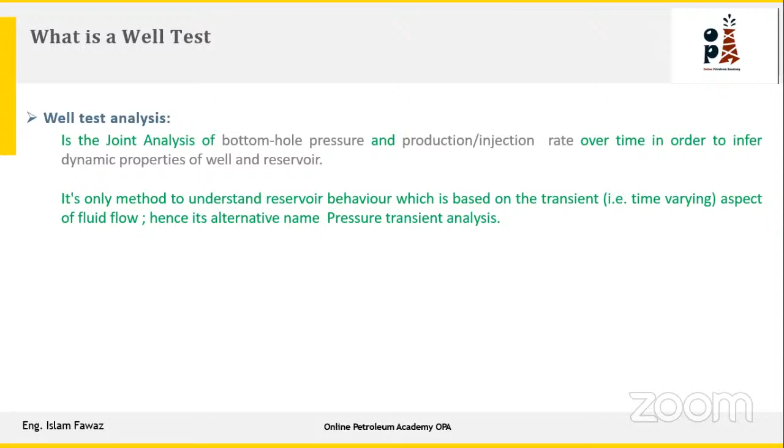This method mainly relies on the transient state, meaning the pressure wave doesn't hit any boundaries, such as an aquifer, a fault, or a change in thickness, which could all be considered as a boundary system in pressure transient analysis.

The most important point when talking about well test analysis is to integrate the data with other disciplines. Don't work in isolation, because in pressure transient analysis you can interpret different models and have different scenarios. So we need to integrate this model with other disciplines like geology, petrophysics, and fluid characterization, in order to incorporate all these points into the simulation model and reduce the uncertainty in your reservoir.

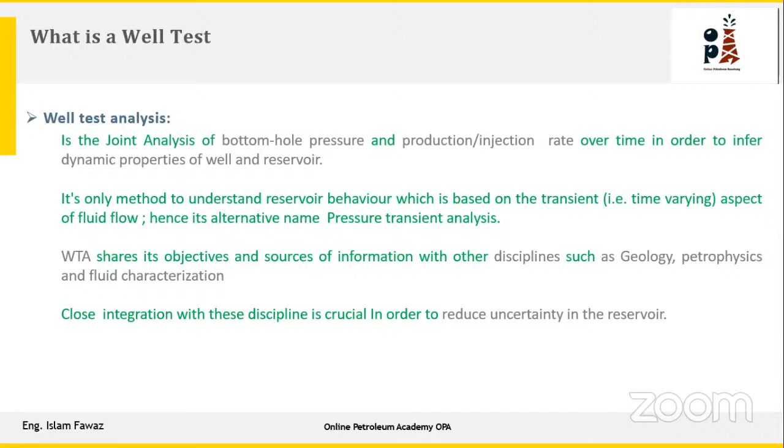So when you ask, I can get the productivity from pressure transient analysis, and I can also get the connected volume, what is the difference? Now, if I have a well with the bottom hole flowing pressure and the rate, dividing the rate by delta P gives the productivity index of the well. So what is the difference between this and the well test? How do we delineate this from the PI?

PI, as I said, is the productivity index for the well, which is the rate over delta P. This rate incorporates different parameters like permeability, the drainage area of the reservoir, and the skin factor — all lumped into one parameter called the productivity index of the well. So the productivity index from the well test tells us how good or bad the well is, because we need to discriminate between the skin and the permeability. If the well is producing well, it's okay, we use the permeability.

But if the well has a bad performance, how to discriminate between the bad performance? Is this related to the permeability of the reservoir or related to the skin? From the well test analysis, we can discriminate between this. Also, we need to delineate it from the material balance itself.

From the material balance itself, the reserves allocated for the well started from the initial reservoir pressure until the reservoir pressure is depleted to the current reservoir pressure. We produce some volumes, and by running the material balance, this is the connected volume. So what is the difference? From the material balance, we can get the connected volume. From the well test analysis, we can get the connected volume. But the difference here is how the connected volume is distributed in the reservoir, since we can define it from the material balance and from the well test analysis.

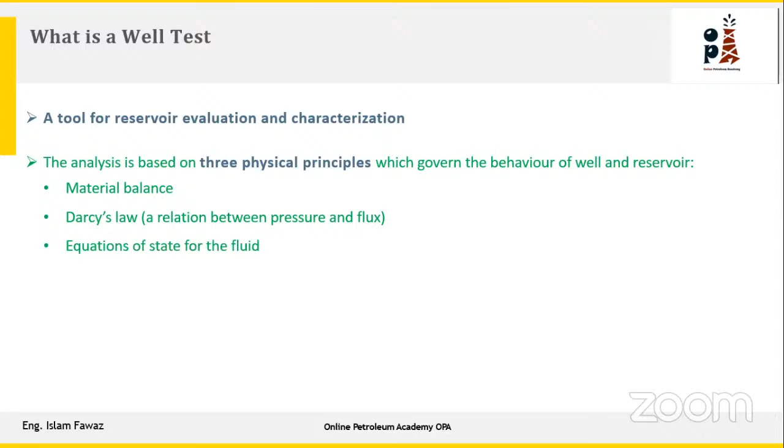So well test analysis is a tool used for reservoir characterization and mainly based on three basic principles. First one, which is the material balance concept. Second one, which is Darcy's law, which is relating the pressure and the flux of the well. And the third one, which is the equation of state of the fluid.

So what is the objective of well test? The objective of well test is used mainly to define the reservoir limit. If we drill a well and we have exploratory wells and we have a sand, I need to define the boundaries of the reservoir, how much connected volume with the reservoir. So we run the drill stem test to define the reservoir limit, the distance to the boundaries and the drainage area for this.

Second one was production. We need to define the average reservoir pressure from the well test. We need to characterize the reservoir in order to impose this for a simulation model. We need to define the permeabilities from the well test. We need to define the completion efficiency from the well test. We need to define the skin factor. We need to define the reservoir model.

We have a layered reservoir or we have a composite reservoir. We need to define the contact. We need to define the gas contact. We need to define the condensate banking from the well test. We need to diagnose the productivity problem from the well test by defining the permeability and the skin.

As I said in the first slide, the productivity index is a lumped single parameter which reflects the state of the reservoir. But from the well test, we can define whether this performance is related to the permeability or related to a skin factor. The last one, we can evaluate the stimulation treatment. We need to find the skin factor, find the fracture half length of the reservoir, find the fracture conductivity, and so on.

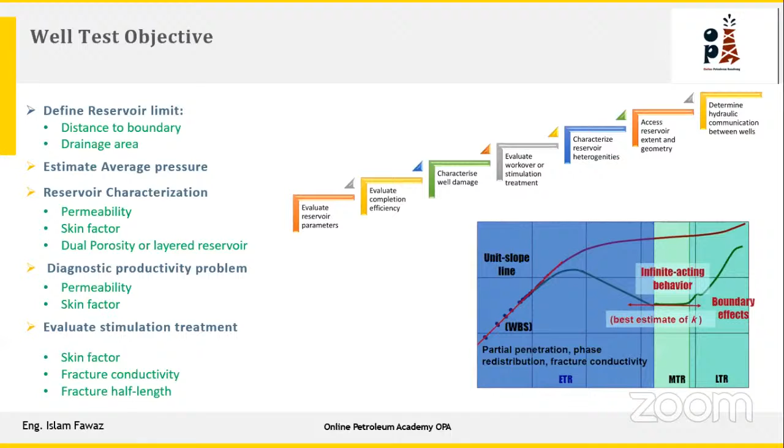So how do we test a well? Testing a well is just to create a step change in rate, for instance, in case of making a pressure buildup, we shut in a producing well. In case of making a drawdown, opening a shut-in well. In case you are performing a falloff test for an injector, we close the injection well.

So as you see here, we have designed the well to produce with a constant rate. After that, we shut in the well. After we shut in the well, this is the corresponding bottom hole flowing pressure, because due to this production, after we shut in the well, the pressure will increase. We analyze this point to refer to the productivity or the characteristic of the reservoir itself.

Okay, so testing the well is just to create a step change in the rate and measuring the response due to this step change in the rate. So as I said, this is the well test sequence here, and this is the graph showing the pressure profile, and this showing the rate profile here. First, we produce the well at constant rate. Why constant rate? Because constant rate is to measure the constant state of the reservoir. If we have variable rate, we can tackle this point by superposition.

We'll talk about what is meant by superposition. So this well is producing at 600 barrels per day, and this is the corresponding bottom hole flowing pressure.

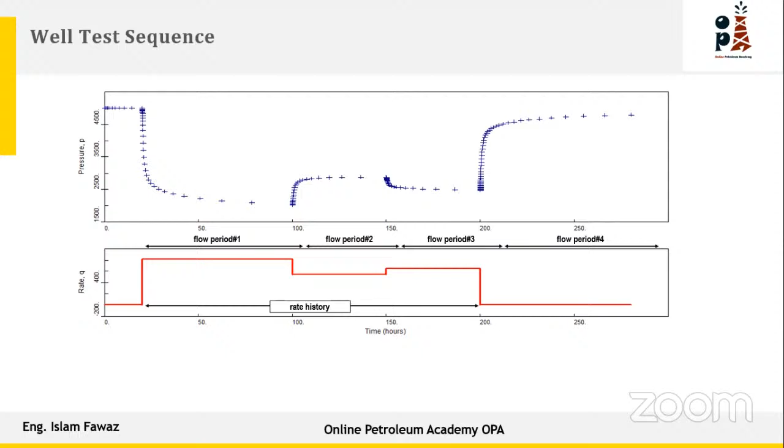We have different flow periods here, and we analyze this increase in the reservoir pressure, because analyzing this point is subject to the rate history you are performing for the well. We just make a rate history for this reservoir, producing the well at a constant rate, and then shutting the well to measure the disturbance that you are making for your reservoir.

The second point we need to talk about is what is meant by production data analysis. As you can see here, we have three main portions of production data analysis: well test analysis, rate transient analysis, and decline curve analysis.

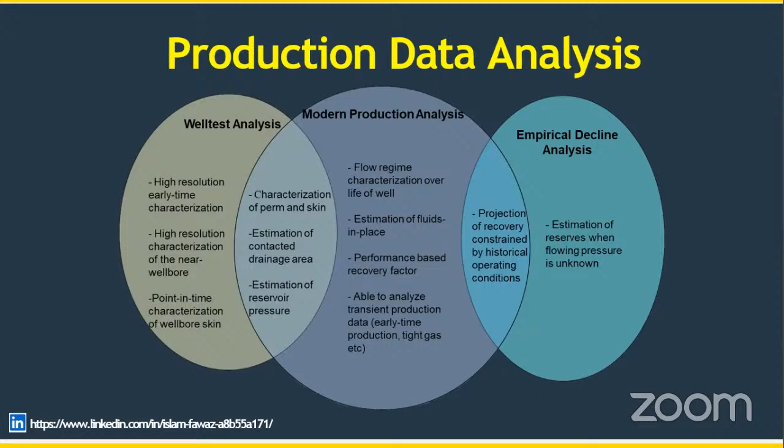And as shown here, we have overlap between the well test and decline curve analysis, which is the rate transient analysis. We'll talk more about this in the next slides.

So what is meant by production data analysis? Production data analysis is the science and art of using information about the reservoir, completion, and/or surface operation, based on continuous interpretation of the data, like bottom hole flowing pressure and the rate.

Based on that, we can give information about the reservoir characteristics, like permeability, fracture properties, and the connected volume.

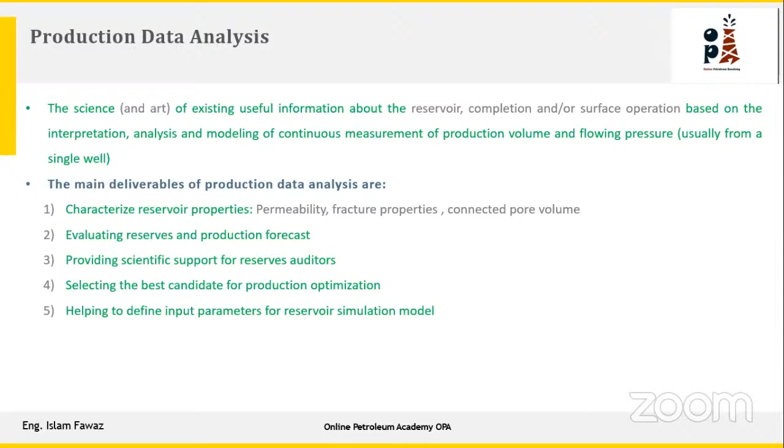Also, we can define the reserves and this can help us for the production forecast. It also provides scientific support for reserve auditors, selecting the best candidate for production optimization, and helps assure the input parameters for reservoir simulation.

As you can see from this plot, we have three main portions of production data analysis. The first portion is pressure transient analysis. As you can see, it is standalone, and the decline curve analysis is also standalone.

We can get from the pressure transient analysis the connected volume, OOIP, and/or the connected gas in place, and from the decline curve analysis we can get the EUR for this well or reservoir.

But as you see here, we have overlap between rate transient analysis, pressure transient analysis, and decline curve analysis. We can get the same information from the decline curve: we can give the EUR as you get from decline curve analysis, and we can give the oil in place as you get from pressure transient analysis.

So what is the difference between all of this? The difference between pressure transient analysis and rate transient analysis is that no shut-in is required, because rate transient analysis doesn't require shutting in the well.

We just need a permanent gauge, or the bottom hole flowing pressure, continuous measurement of the bottom hole flowing pressure and the rate, and after that you can get data about the reservoir characteristics. For the rate transient analysis, we can get the connected volume from the flowing material balance.

So what is the difference? Rate transient analysis is based on physics, based on science, based on the data.

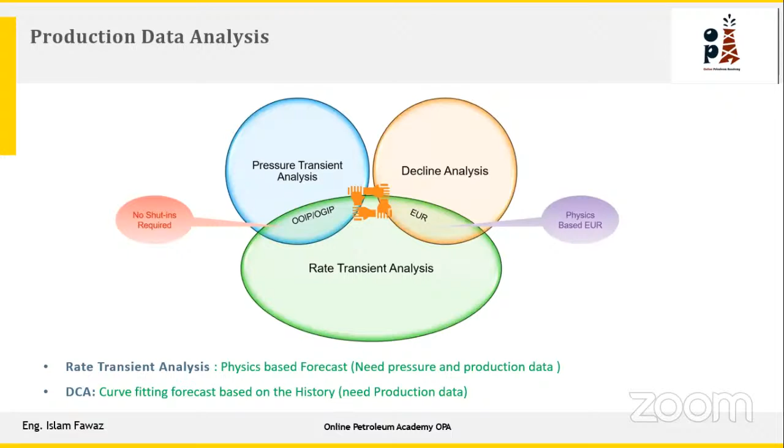But the decline curve analysis is mainly based on analogs, mainly based on empirical correlation. Fitting the data, after fitting the data, we can get the EUR connected for this well. So in conclusion, decline curve analysis is an empirical equation, and rate transient analysis is based on physics.

So for the decline curve analysis, what we are getting is developed by Arps. We just have a rate history, we don't require a bottom hole flowing pressure. We fit the rate history, and after fitting the rate history, we can get the EUR for the well.

The key parameter in the language of the reservoir engineer is the b-factor. It means b=0 equals exponential, b=1 equals harmonic, and b between 1 and 0 is hyperbolic. This is very important because the b-factor has physical meaning — it mainly depends on the drive mechanism.

If we have a depletion drive mechanism, meaning we have a severe decline in pressure, the B factor is equal to 0. But if we have support for the reservoir, the B factor will be higher, and the reserves will be higher. So mainly for decline curve analysis, we just fit the data. After fitting the data, we interpret it: what happened in the past will continue in the future. After that, we can get the production forecast and recoverable reserves under the operating and current conditions.

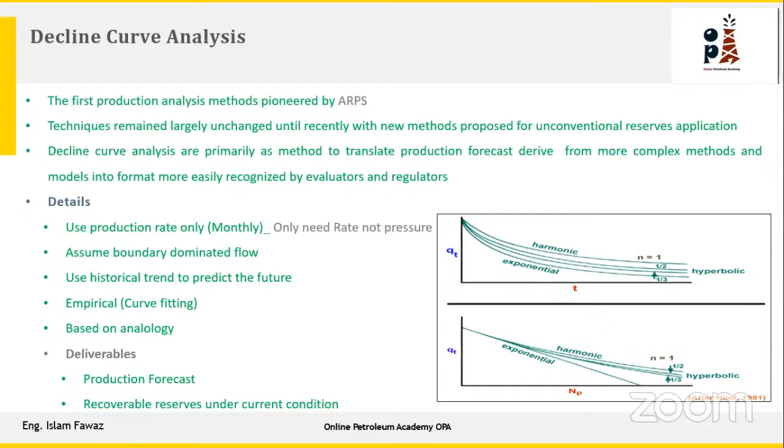So again, decline curve analysis is an empirical decline analysis, and the main golden rule for decline curve analysis is: whatever factor controlled the decline in the past will continue to control the decline in the future.

So we have two main factors which affect the decline curve analysis. One is related to reservoir condition, which is depletion. The other is the number of wells. If we have a higher number of wells, the decline would be more, accelerating the reservoir. The drive mechanism, if we have a depletion drive mechanism versus a strong aquifer support, this will reflect on the decline rate itself.

Reservoir characteristics in terms of permeability, porosity, phase distribution within the reservoir, saturation changes, and relative permeability also matter. Another factor is related to the operating condition, like changing the artificial lift, choke size, back pressure on the well, or operating separator pressure.

That's why when performing a decline curve analysis, some companies perform it on a CD rate, and other companies perform it on a BD rate. The difference: CD is calendar day, and BD is the number of hours the well is actually on production.

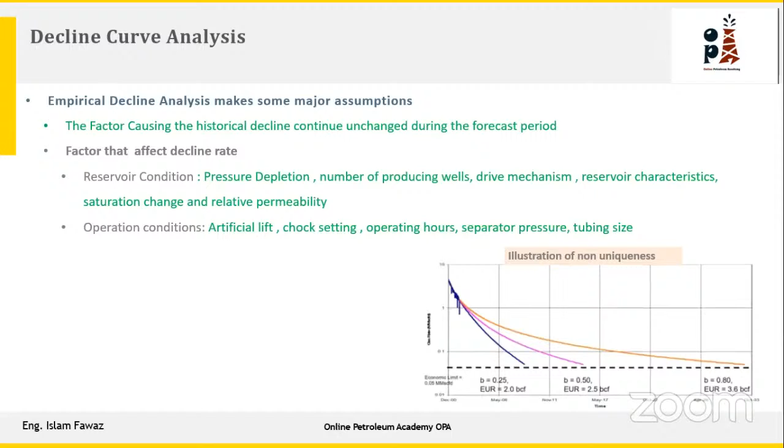So for decline curve analysis, yes, it's easy, we can do it. The advantage is it's very simple and gives a rough indication of well performance, but we have limitations for decline curve analysis.

From its limitations, we assume constant operating condition, we assume the reservoir pressure behaves in a constant way, and we assume the reservoir has reached its boundaries. In transient flow, we cannot perform decline curve analysis. But once the wave reaches the boundaries of the reservoir, meaning we're in boundary dominated flow, we can apply decline curve analysis.

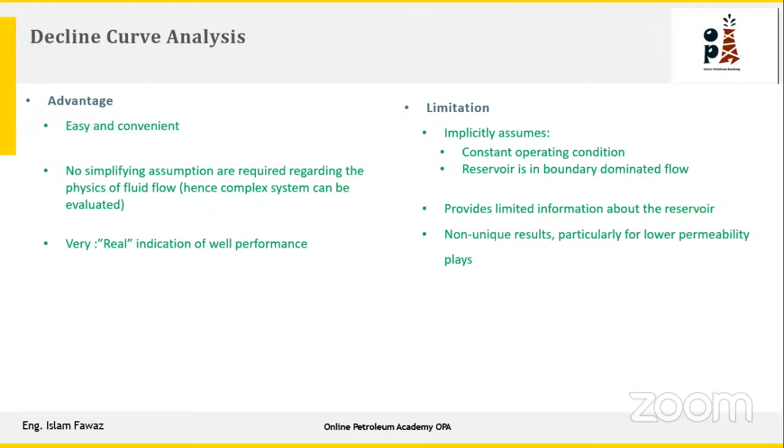Also, a main limitation of decline curve analysis is the non-unique result. Every engineer performing decline curve analysis can get a different number, and all of those numbers are possible outcomes. So we have non-uniqueness of results, particularly if we have a lower permeability reservoir or lower permeability play.

When you have a low permeability reservoir, as I said in pressure transient analysis, you produce the well at a constant rate, then make a step change, shut in the well, and measure the pressure buildup response. But if we have a low permeability or nano-darcy permeability reservoir, how do we characterize it? We need to think about a different concept: how to characterize the reservoir in a low permeability setting. We can use rate transient analysis.

Rate transient analysis is the same principle as the PTA, but is mainly focused on the late time region, mainly the boundary dominated flow. This does not replace the PTA in all circumstances. We just have continuous bottom hole flowing pressure measurement and a rate, with a single phase in the reservoir, and then we can perform rate transient analysis by different graphs.

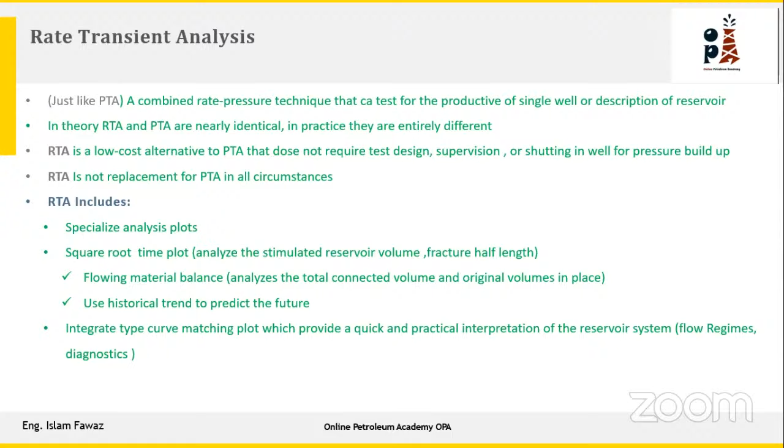As I said in the first slide, it is science and art. This is art because we have a log plot, we have a square root plot. All of those plots just give more insight about the data itself. So we have a specialized plot in order to give more insight about the reservoir characteristics or about the boundaries of the reservoir. And after that, we can integrate all the valuable information together to get more insight about your reservoir.

We can solve rate transient analysis for single phase above the bubble point pressure, because we have constant fluid properties like density and viscosity, and constant compressibilities. But in a gas system it is more complex and we need some correction for the pressure, because the fluid properties will change heavily at higher pressure for gas. But in case we have a variable rate, we can handle this variable rate by superposition, for rate transient analysis and for pressure transient analysis.

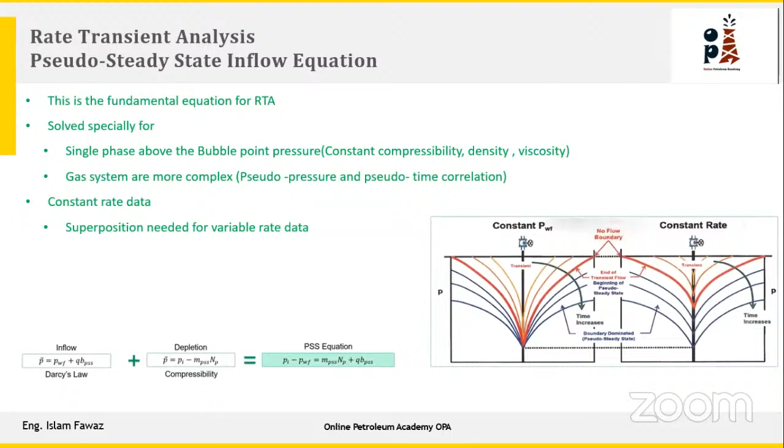So we have two components for rate transient analysis. One component is the inflow parameters, which come from Darcy's law. It relates the difference in pressure due to the influx, between the average reservoir pressure and the bottom hole flowing pressure, to Q times b PSS. We'll talk about this in more detail. Plus the depletion term, like the compressibility term, for a volumetric reservoir. This comes from this point. After that, we integrate Darcy's law and the material balance equation in order to get the pseudo steady state condition, which is mainly used for rate transient analysis.

Let's come to the inflow term here. As you see, this is the well, this is the boundary of the reservoir, this is the bottom hole flowing pressure, this is the average reservoir pressure, and this is the initial reservoir pressure, P star. So what is meant by inflow properties or the inflow term here? As you know, this is the Darcy equation, Q = k A ΔP over μ L. If we arrange this equation in terms of pressure, it means P bar minus bottom hole flowing pressure equals Q times this term, called PSS, pseudo steady state, which is 1 divided by the productivity index.

What I wanted to tell you from this graph is that when we have pseudo steady state and we have a constant rate, then with time, the first point in time here is the bottom hole flowing pressure, and this is the pressure wave of the reservoir at the boundaries of the reservoir. With depletion in this reservoir, the bottom hole flowing pressure will be depleted.

By knowing this shape, we have constant delta P from here to here, and also constant delta P from here to here. By knowing the bottom hole flowing pressure, we can infer the reservoir pressure without shutting the well, and we can infer from the flowing material balance the connected volume of the reservoir. This is what's meant by inflow term.

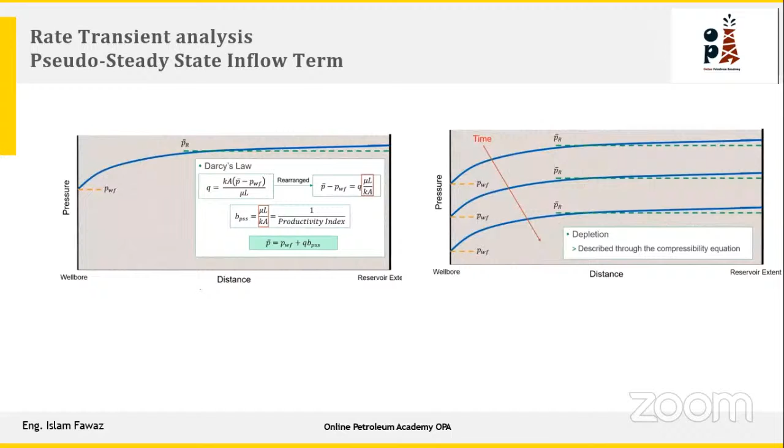But in the case of the depletion term, like a material balance, at the initial state of the reservoir we have N volume. Once you produce a volume, what we are producing is NP. What remains is the initial volume minus what we are producing. This remaining is related to the delta P that we have due to the production. This is due to the fluid expansion itself, the delta P due to fluid expansion itself.

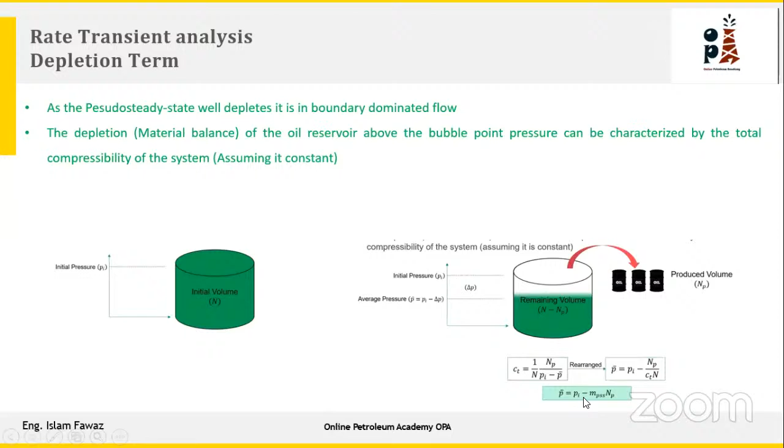By putting this in the equation of the compressibility term, we have total compressibility, change in volume per unit pressure. This is the total compressibility, and this is the original N, the original stock tank oil in place that you have. This is NP, what you are producing. This is Pi minus P bar. If we rearrange this equation, you can get P bar in terms of P initial minus the material balance slope and NP. By combining the two equations together, this is the inflow equation in terms of the average pressure, and this is the depletion equation, we can get this term.

At constant rate, we can refer the depletion in the reservoir pressure by this equation. So by knowing the bottom hole flowing pressure, and knowing this from the history of this reservoir, you can get the characteristic of the reservoir. This is what's called flowing material balance. From the bottom hole flowing pressure, you can get information about the average reservoir pressure, and also the connected volume within the reservoir. If we have variable rate, we can handle this by superposition.

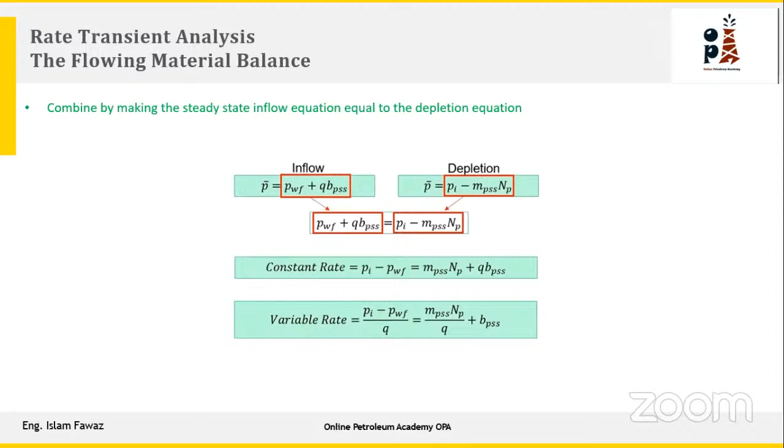So rate transient analysis is one of the production data analysis methods that combines pressure transient analysis and decline curve analysis. We have overlap between pressure transient and decline curve analysis. Combining Darcy's law, the equation of state and material balance, we can give information about the reservoir and well. This is not a replacement for PTA. This is just for the production data.

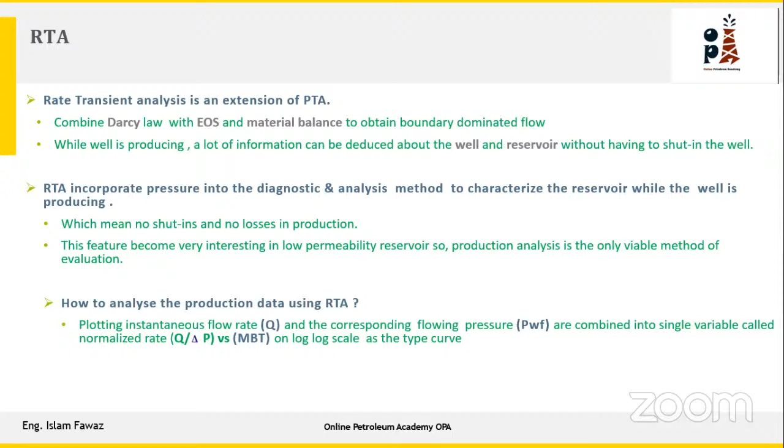How do we analyze this data? As I said, by knowing the continuous measurement of the bottom hole flowing pressure and the rate, we can convert this into a single variable, normalized rate, and put it against material balance time on log scale, and also we can derive the type curve and the characteristics of the reservoir. This is what I want you to take as the final message or key takeaway from this presentation: the integration of the knowledge.

As I said, well test analysis is high resolution because it is mainly focused on the unsteady state condition, and you can get from this the reservoir characteristics, permeability and skin. Also, from transient analysis you can get permeability and skin. Also, you can get the connected volume. Also, you can get the average pressure. All of this we can get from the well test, and you can get it from the production data analysis or RTA.

But RTA is performance based on the recovery factor, not decline curve analysis. Decline curve analysis is just based on an empirical equation, just fitting the data. After fitting the data, you can derive the EUR. It doesn't take into consideration that we have a depletion driven reservoir and the abandonment pressure for the reservoir. If you perform decline curve analysis for a depletion driven reservoir, you are just fitting the data and not taking into account the bottom hole flowing pressure.

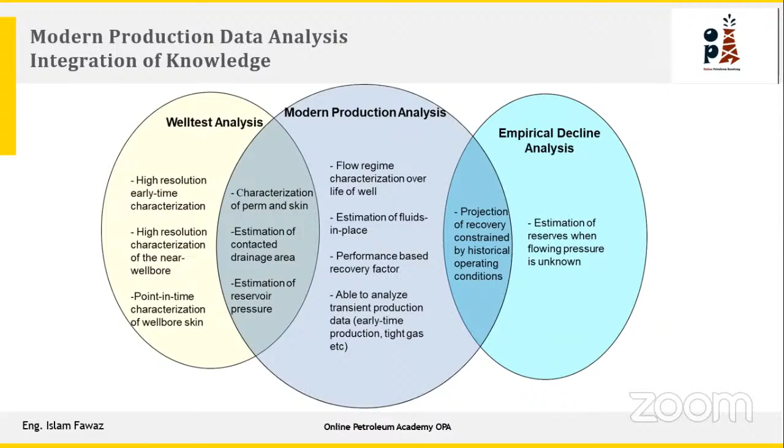But for rate transient analysis, taking into consideration the bottom hole flowing pressure, that's why this is a projection of the recovery constrained by historical operating condition, taking the historical operating condition into consideration for the rate transient analysis.

This is a difference between RTA and PTA. PTA, as I said, a controlled set of actions, open, shut in the well, to send a signal into the reservoir. This signal gives a fingerprint about the reservoir and gives information about the reservoir characteristics. But RTA also uses the same, just don't shut in the well, the well is opening, and measuring, if we have a permanent downhole gauge, the bottom hole flowing pressure and the rate,

you can get information about the reservoir. And also if you have some accident in the well, like the well is shut in due to operational problem, you can get this information because we have a free well test. You can make a bottom hole pressure transient analysis, like a PTA, free. The same principle uses the Darcy equation, continuity equation, and the material balance to give information about the reservoir.

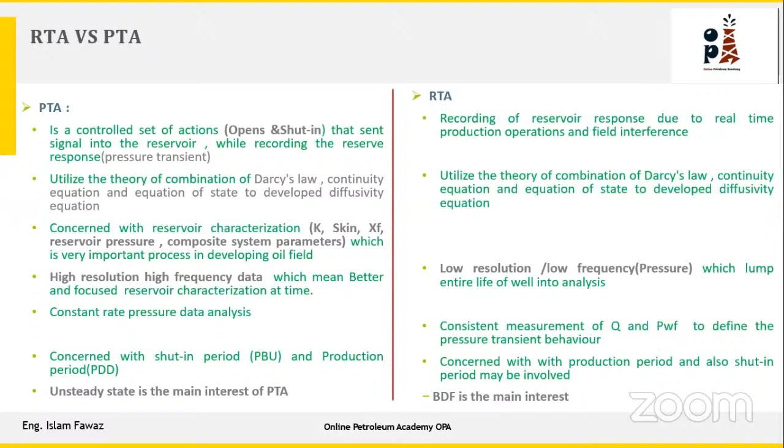But the main different point here, or the main key point from this slide, is that rate transient analysis is low resolution, low frequency. You can give pressure data every 1 month. But for the pressure transient analysis, I need the pressure data every second. So low resolution data, low frequency. We can lump 2 years or 3 years in the same plot. But the pressure transient analysis is mainly focused on transient state condition. So pressure transient analysis and transient state condition is the main interest. Rate transient analysis, the boundary dominated flow is the main interest.

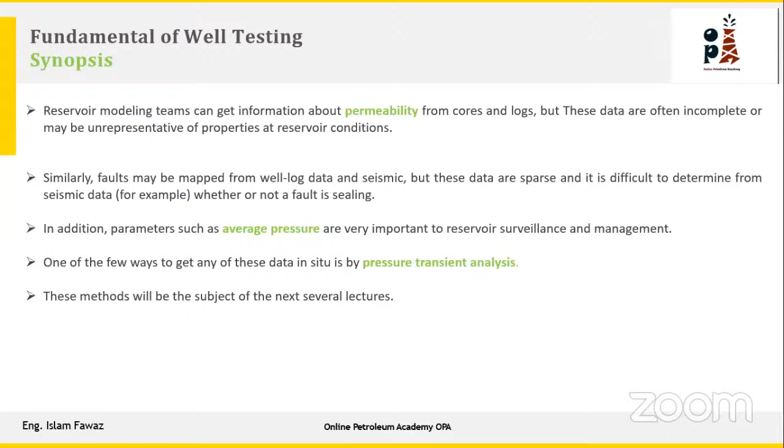This is the synopsis of this well test analysis. Here you can get the permeability. Also you can get permeability from the core. Also you can get permeability from the open hole log by correlation. You can estimate the permeability from other logs, but pressure transient analysis gives in situ permeability. Not just permeability, it is called flow capacity, KH over mu. Also, we can update your structure. You can tell the geologist how the volume is connected from the pressure transient analysis. Also, we can define the average pressure of the reservoir. This is the objective of the pressure transient analysis.

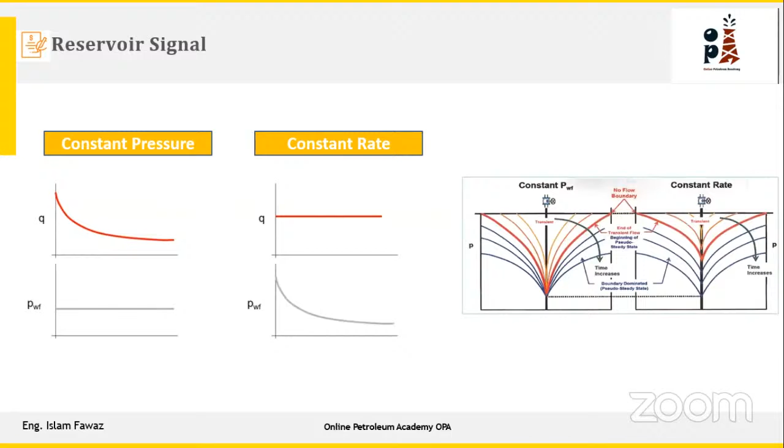What we are using for the pressure transient analysis is the constant rate solution, and the rate transient analysis is the constant pressure solution, because as you see from this graph, delta P in the boundaries will be reflected in the well location here, and you can tell from the rate transient analysis the depletion in the pressure, and from the bottom hole flowing pressure the average pressure without shutting in the well, and define the connected volume of the reservoir. So transient flow, this happens at the initial condition of the reservoir. The pressure will propagate into the reservoir until it hits a boundary.

From the transient state, we can define the skin, define the permeability. Once we hit the boundaries of this reservoir, this is the boundary of this reservoir, we can define the connected volume of the reservoir. We can define the initial reservoir pressure. This wave is a fingerprint of this reservoir, like we are performing some X-ray. This is a fingerprint of you. So this fingerprint contains information about the reservoir characteristics, which is your main interest. This is the equation that will be used for the diffusivity equation, like the line source equation. We have bottom hole flowing pressure. We have a rate here. Entering those parameters, we can give the characteristics of the reservoir, like permeability and flow capacity of this reservoir, and the boundaries and the skin.

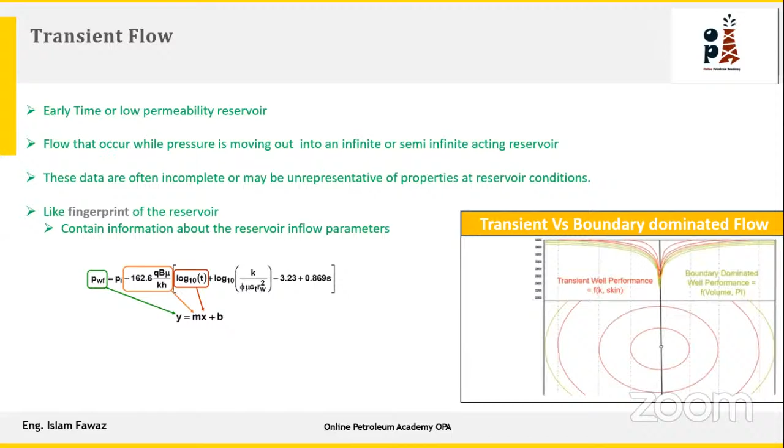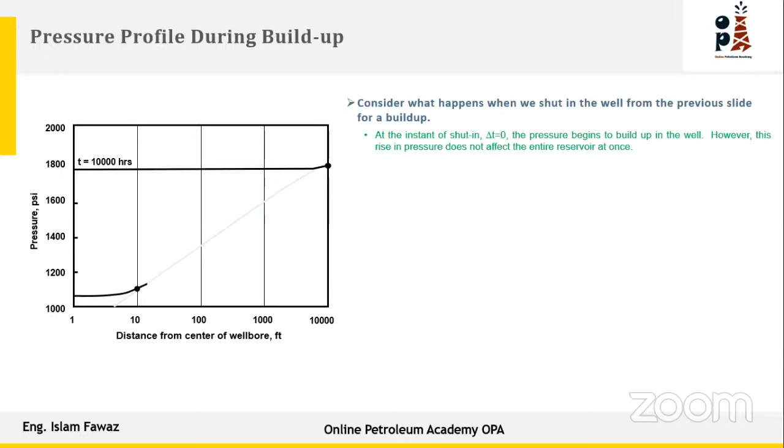So imagine the pressure profile during the buildup. Once we shut in the well here, the well is producing with constant rate and then we shut in the well. Imagine what will happen when we shut in the well. This graph shows the distance from the wellbore, and this shows the pressure, how the pressure is built up. The first one at time 0, this is the pressure, which is currently the bottom hole flowing pressure at time 0. Increasing the time, which shows here the distance, the pressure wave will move farther away from the wellbore.

After 1 hour, the pressure wave will move 100 feet from the well bore. After 100 hours, it will move 1,000 feet out from the well bore until the pressure is stabilized and reaches the boundaries of the reservoir. This is the pressure wave, or the radius of investigation.

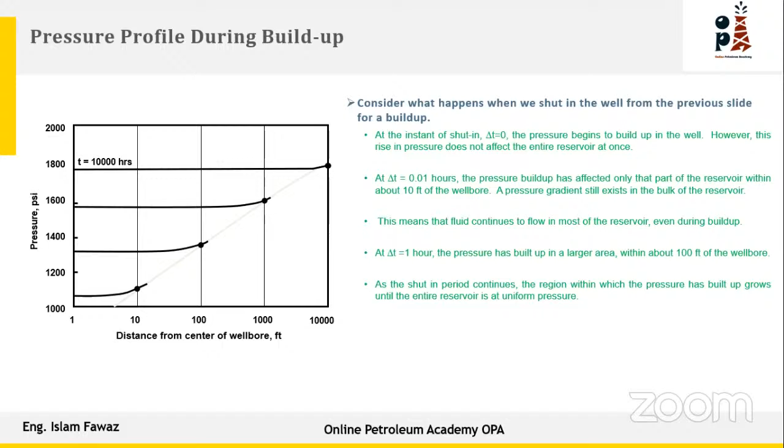Once we shut in the well, the pressure will propagate into the reservoir until it reaches the boundary. After that, we can define from this pressure curve the characteristics of the reservoir. Once the pressure reaches the boundary, this is the pseudo-steady state condition. We need to define the volume, how much connected volume we have.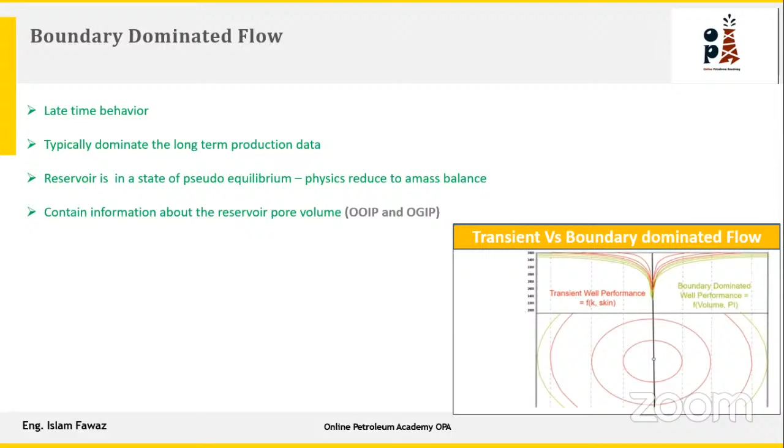This is shown by the material balance. Material balance shows the connected volume, but it cannot tell you how it's connected with the reservoir. The oil could be distributed laterally or vertically, we don't know. From pressure transient analysis and rate transient analysis, we can define how the volume is connected within the reservoir. So this is a puzzle for investigation here.

We have two wells. The first well is producing 100 barrels of oil per day, and the second one is producing 5 barrels of oil per day. Does this impact the radius of investigation? This is the equation of the radius of investigation. The answer is the same. Why? Because the rate is not related to the radius of investigation.

As you see here, the radius of investigation term is related to the permeability of the reservoir. This is the speed of the wave moving out into the reservoir, called hydraulic diffusivity. This term affects the well spacing and simulation. All these terms, like permeability, porosity, viscosity, and compressibility, will affect the well spacing and simulation itself. So the radius of investigation depends only on these four parameters: permeability, porosity, viscosity, and compressibility. It doesn't relate to the rate.

So what is the input for the well test, and what is the output from the well test? Let's look at the equation to see what is the input here. The input here is porosity. Yes, this is input. The first input is bottom hole flowing pressure and discretized rate. This is the first input.

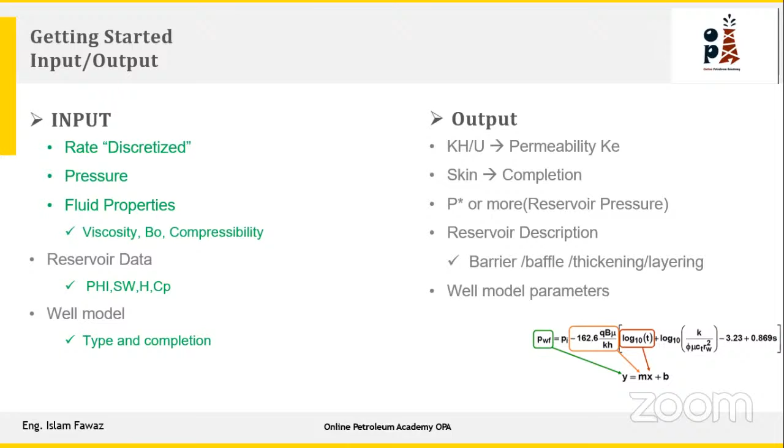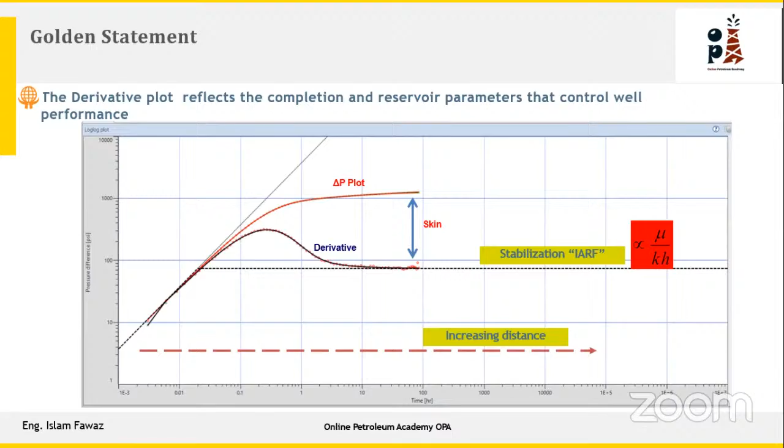So finally, we'll talk about the well test interpretation model. What is the interpretation model for the well test? We have three main regions for the well test. The first one is the wellbore storage region, which is near the wellbore. The second one is the middle time region, which will reflect the reservoir characteristics. After that, the boundary or the late time region, which reaches the boundaries of the reservoir, faults or aquifer, or a change in the H, which is the thickness of the reservoir, or a change in the fluid, which is oil or gas or water and something like this.

We have three main stages. The first one is model identification. Before performing any pressure transient analysis, you have to identify which model you have. So for the early time region, you need to define whether we have wellbore storage or not, skin or not, whether we have a fracture, partial penetration, or a horizontal well or not. All of these are model identification. For the middle time region, we can define whether we have a homogeneous reservoir, a double porosity reservoir, a composite system, or a two-layer reservoir. You can define this from model identification.

For the late time region, we need to define whether we have boundaries. I need to design a test in order to define whether there is a nearby boundary or not, in order to define the gas contact, in order to define the condensate banking. So model identification is the first point before we perform a well test interpretation model. After we define the near wellbore effect, the reservoir behavior, and the boundary effect, we are interpreting the model.

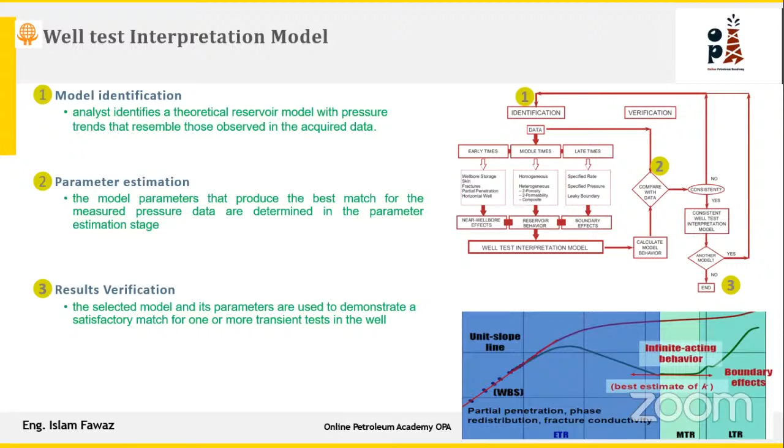After that, I need to define if there is any boundary, if there is a closed system, if we have faults, if we have a channel, if we have two intersecting faults with an angle, if we have a change in a fluid, like the gas contact. I need to monitor the gas contact with time. You can run a pressure transient analysis. You can define it from the pressure transient analysis.

For the interpretation methods for the PTA, we have three. We have the straight line method. We have the log-log plot method. We have the type curve method. The straight line method, as I said in the first slide, is science and art, not just mathematics. We have pressure data, bottom hole flowing pressure data, and rate data, and by plotting some charts we define the flow regime of the reservoir. And this is the summary.

If we have a wellbore storage effect, delta P over delta T shows as a line on this graph, something like this. If we have a fractured reservoir, if we plot delta T to the power half versus delta P, you can show a high K fracture, and so on. For limited entry, which means partial penetration, we have to stabilize. The first one is stabilization for the thickness of the reservoir, and the second one is stabilization for the total thickness of the reservoir.

So we have some plots that can help give more indication about the near well bore effect and the reservoir behavior. If we have a double porosity system, you can define it from 2 parallel lines, or one and one, you can call it an S shape. If we don't have a double porosity system, you can misinterpret a fault as a double porosity system, but from this graph you can definitely determine if this is related to 2 parallel faults or related to double porosity.

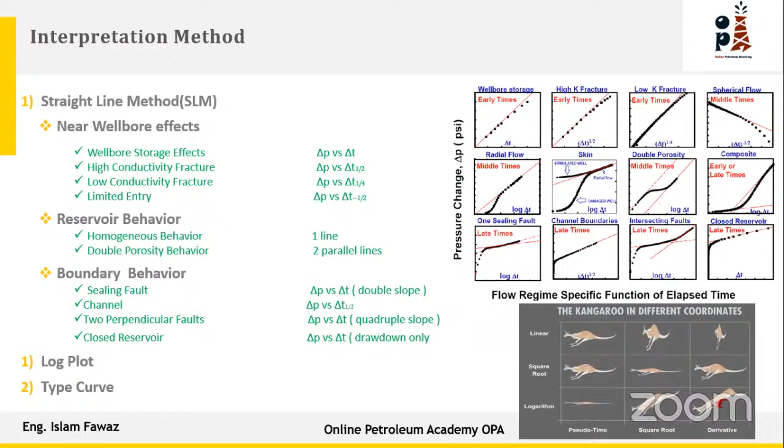For the log plot, I will talk about this point in the next slide. Type curves are mainly used for the log plot, to show the difference between different interpretations, like the log plot. And sorry, this is the kangaroo.

What's meant by kangaroo here: if we have a kangaroo and put it instead of an A4 sheet, you can put it on a rubber sheet and stretch the rubber sheet in the vertical axis, and stretch it in the horizontal axis, and you can get another piece of information about the reservoir.

So this is if you have bottom hole flowing pressure plotted in linear plot. This is the original state. We can know more detail about the reservoir here.

But if we put it in logarithmic scale, with time and delta P on log scale, and stretch it on the x-axis, you can define the speed, how fast the kangaroo is moving. But the main beauty here for the kangaroo is the derivative.

If we stretch or distort the data like the derivative here, it can tell you the kangaroo has a baby. So with the data and the mathematics, we can give more information about the characteristic of the reservoir.

From this data, we are measuring only from the build-up about 10 psi or 5 psi, from 5 psi from the bottom hole flowing pressure to reaching the boundaries, or 6 psi. So we can determine from this 6 psi data the characteristic of the reservoir.